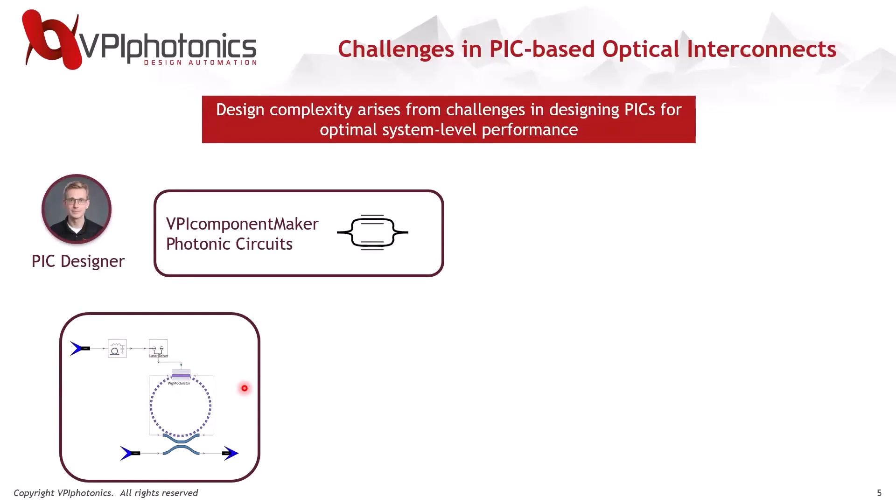For example, you might have a PIC designer, today that will be Eugene, who's working on designing and modeling a silicon photonics microring modulator, which is not a trivial task in itself. When he's done, he will pass that model to Nebraska, who will represent the optical systems team, to integrate it into the full optical interconnect system, which may contain electrical and optical components in the transmitter and in the receiver. It might contain a fiber span, multiplexing, equalization, DSP, and more. So also not a trivial task.

Those two teams need to work together to do some file exchange to ensure that the PIC model can be used in the full system simulation. Also, this microring modulator may degrade the performance of the system in some unexpected way. So the teams actually need to go back and forth between the system simulation and the photonic circuit design, which can be complicated and time-consuming.

So what we provide is a solution that brings together PIC design and system simulation, all within VPI Photonics design suite. It's a single user interface and single design environment. We've integrated the system solutions together so that your PIC can be tuned and optimized while considering the full system level performance. Schematics can simply be shared between the PIC designer and the optical systems team, so they can collaborate together, saving time, but also reaching the optimized PIC performance that considers the full optical interconnect system.

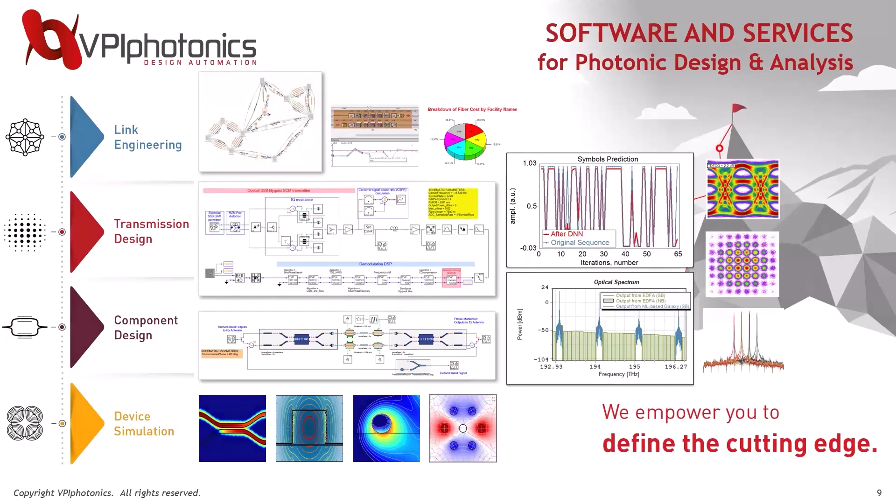Today, we are going to be focused on VPI Photonics Design Suite, specifically using the two solutions, VPI Transmission Maker Optical Systems, together with VPI Component Maker Photonic Circuits. But you should be aware of our other software tools. We've developed them all in-house so they can all be integrated together in a complete photonic design workflow. If you check out our YouTube channel, you can see a number of tutorials going through many of these different tools.

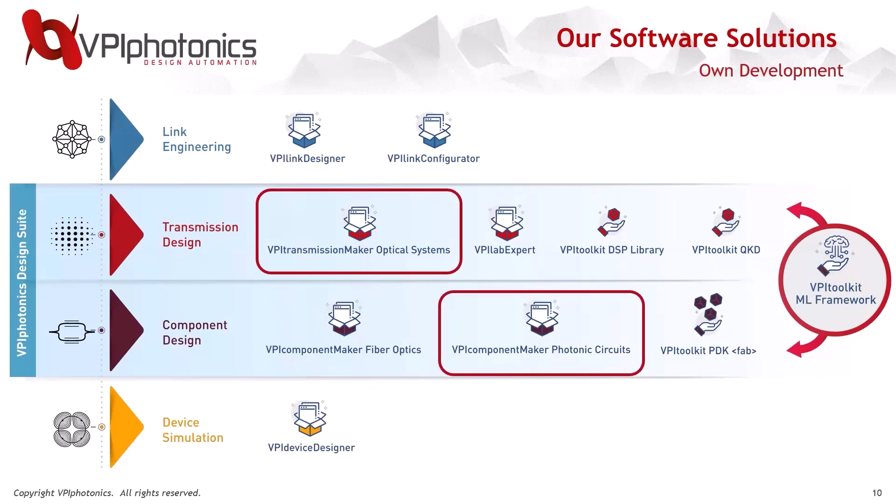To share more details specifically about VPI Transmission Maker Optical Systems, it can be used for a wide range of applications. Today we're going to be focusing on short reach optical interconnects, but it also supports ultra long haul DWDM systems, even radio over fiber and laser SATCOM simulations. It can be used to simulate single mode and multi-mode fibers, explore different coding and modulation formats, study different DSP algorithms, compensation strategies, and equalization strategies as well. It also provides very flexible analysis tools to generate eye and constellation diagrams, and also to evaluate different metrics like bit error rate, TDEC-Q, OMA, extinction ratio, and more.

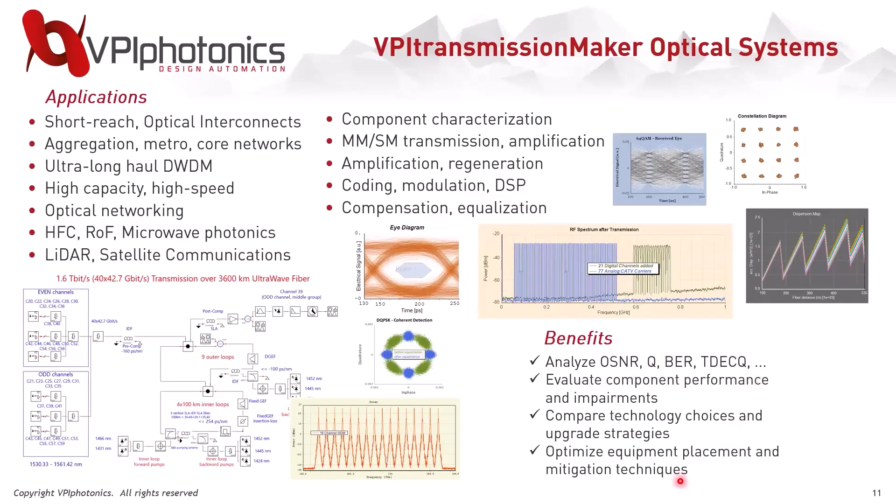We'll also be focusing today on VPI component maker photonic circuits, which supports more physical and bidirectional modeling on a smaller length scale and time scale for active components, for signal processing elements, and for passive circuits. This tool is material agnostic, so simulations for hybrid PICs are supported. This solution enables you to design your PIC, look at different design alternatives for it, study fabrication tolerances, and in the end, tune and optimize your circuit parameters. One of the highlights of this tool is our active component model, the Photonics transmission line laser model.

Here's an example at the bottom: a widely tunable hybrid III-V silicon laser. You can see that this photonic TLM model is used to model the SOA between the two ring mirrors, and it can account for impairments like back reflections, two-photon absorption, carrier dynamics, and current nonlinearities like four-wave mixing, and more.

We also support Foundry PDKs with the software, and provide a framework for you to customize your own PDK from your own measurements or simulations. You can encrypt those models and share them with other teams or customers to ensure your IP stays protected. So let's take a look at today's agenda.

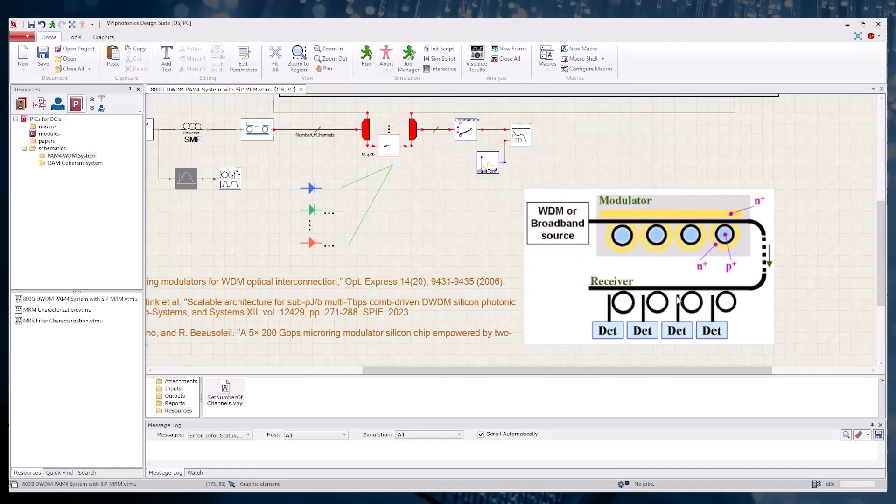The concept of the system is not new, as we see in this figure, taken from reference 1 here, from 2006. The concept is having a WDM source, as you see, and then modulating the output using a set of cascaded ring modulators. At the receiver side, we demultiplex these channels using a set of ring resonator filters, and then we do detection.

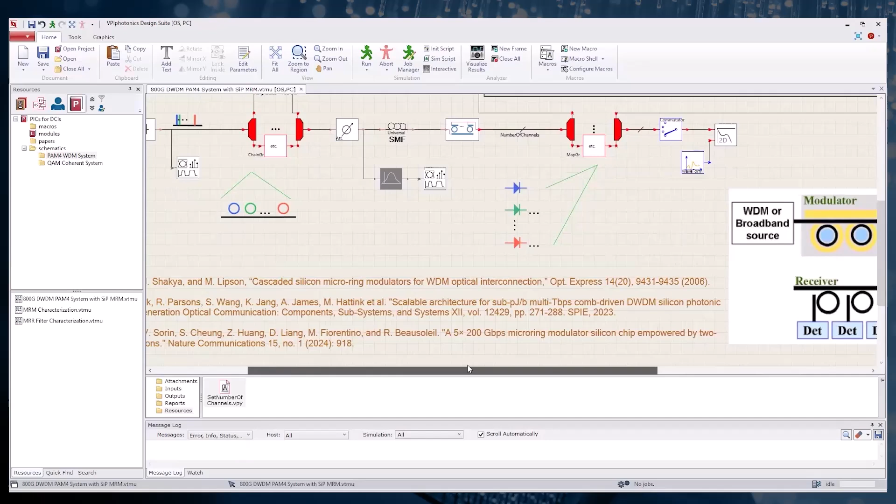Although this is not new, interest in ring modulators and ring filters continues to increase, especially for data center applications. There is tons of literature in this field. You can see newer papers here - references 2 and 3 just as examples, but there is a lot out there on these components for data center applications.

Now let's look at the schematic itself. To implement this concept, at the transmitter side we have the laser sources, and we construct an array of these. You see these modules here, the red modules - these modules help to replicate, so to duplicate a module.

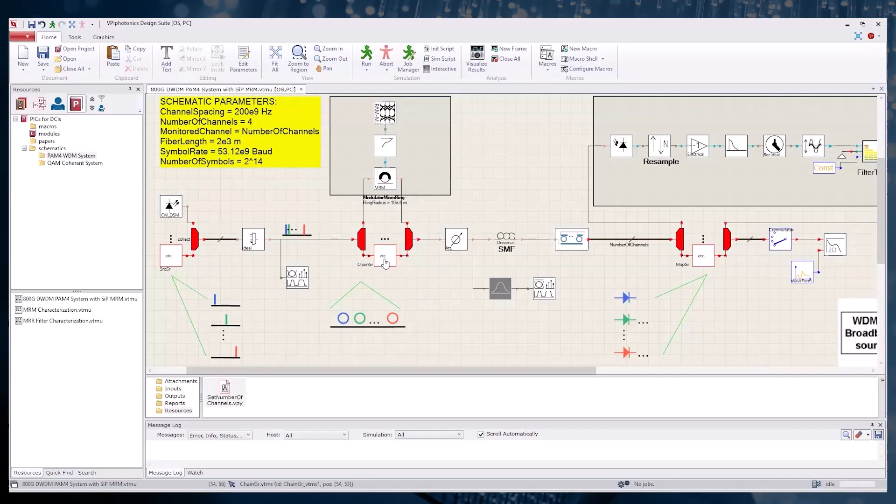For example, using this module, source GR or source graphical, helps me create an array of lasers, whereas this next one, chain GR, helps me create an array of modulators in a cascaded manner, or like a chain. The last module here is similar but different - it also helps me create an array of receivers, but in a parallel manner, so the receivers here are set or created in parallel.

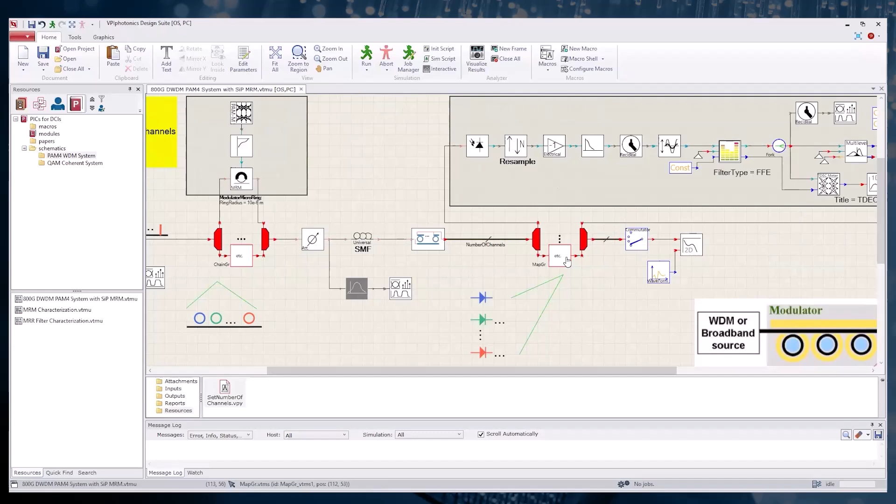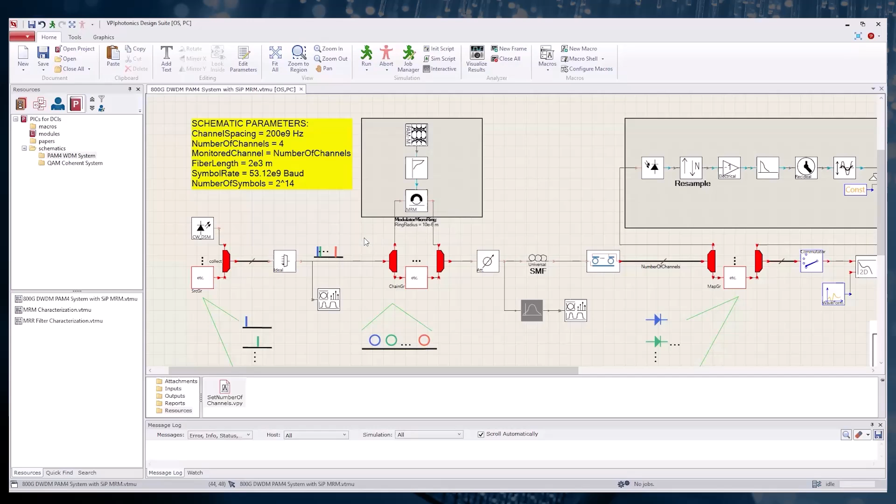Okay, so let's go back here. Using this multiplexer, we multiplex these tones coming out from this array of lasers, then we have a comb signal at the output of the multiplexer. Now these modulators - initially we have 4 modulators for the 4 channels, and each modulator is cascaded again. Each modulator is tuned to a specific wavelength, ideally, so that it applies the modulation to that specific wavelength. There will be some leakage to other channels that we'll be looking at.

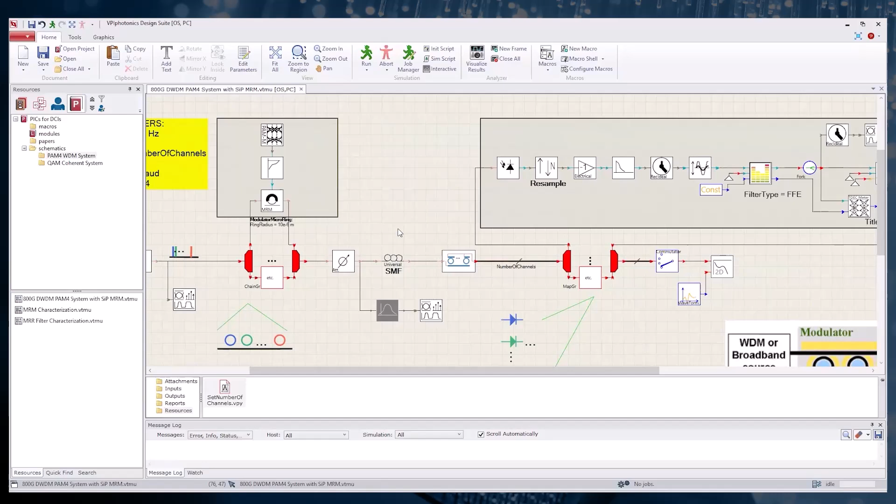But then at the output here, we have the modulated signal, the DWDM modulated signal, with a channel spacing of 200 gigahertz. We do the transmission through the fiber here, and by the way, this is done in the O band, so all the channels experience the different effects of fiber, such as chromatic dispersion, attenuation, and nonlinearities.

And then after transmission, we have the filter. This filter here works as a demultiplexer, and it's based on a ring resonator filter. We can look inside, and we see...

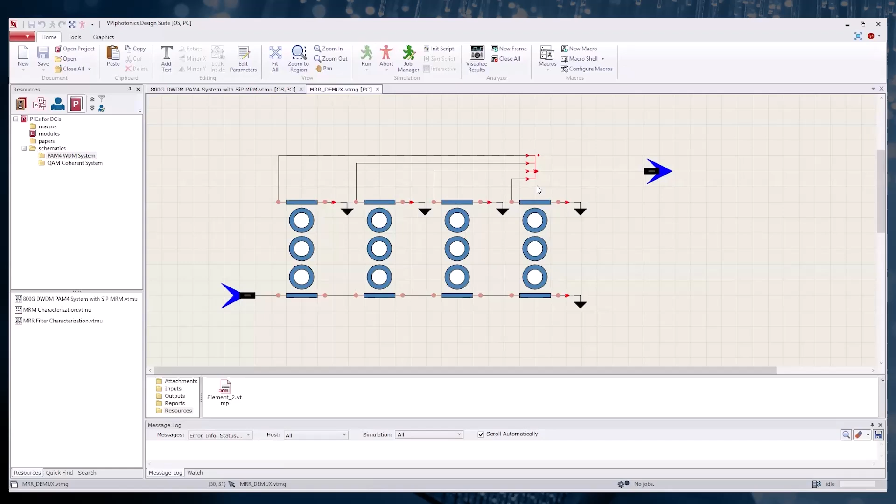These modules are from the library of photonic components in the software, and they give me multiple outputs. So in this case, we have 4 outputs for the 4 channels, and then they are tuned properly so that they tune to these channels, to these wavelengths.

And then at the output here, we detect the signal. So after photo detection for each channel, we do some signal scaling, bandwidth limitation, and feed-forward equalization. And then we assess the TDEC-Q and SER using these modules. Let me run the schematic while we continue explaining it.

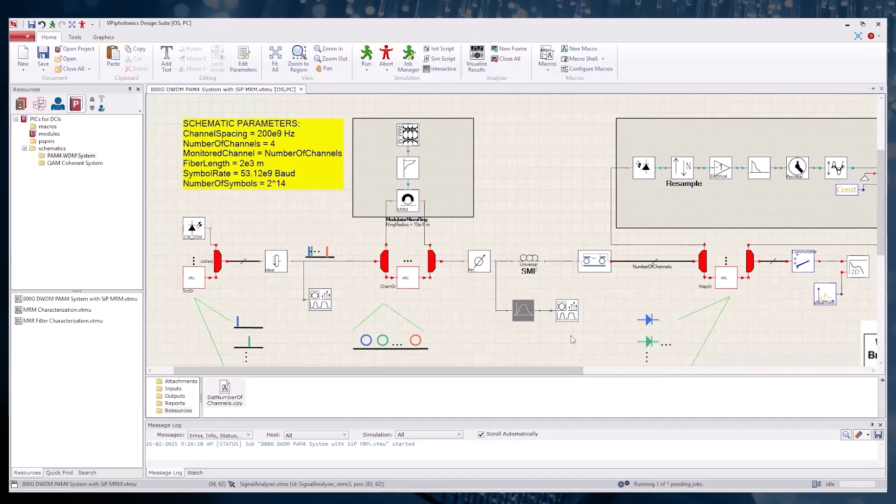So again, here, yes, we have 1 receiver, but just a reminder, it's duplicated, so we have 4 of these in parallel. We have signal analyzers here, so we'll be visualizing the signal at the output of the laser source, the WDM source, and at the output of the modulators, that's after modulation, and we're looking at the SER.

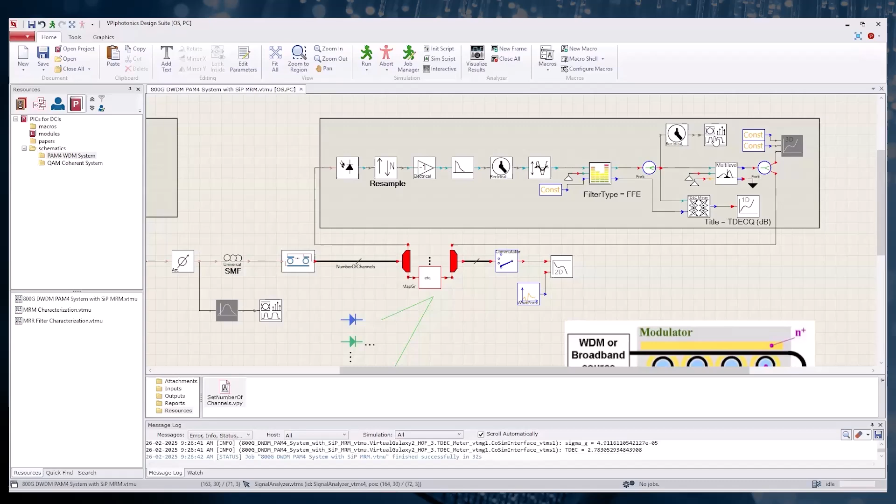That's using this analyzer here. And we'll be looking also at the electrical signal here at this point after equalization. We chose to show the electrical signal for the monitored channel, which we chose to be the last channel. So in this case, monitored channel equals number of channels, so this is channel number 4.

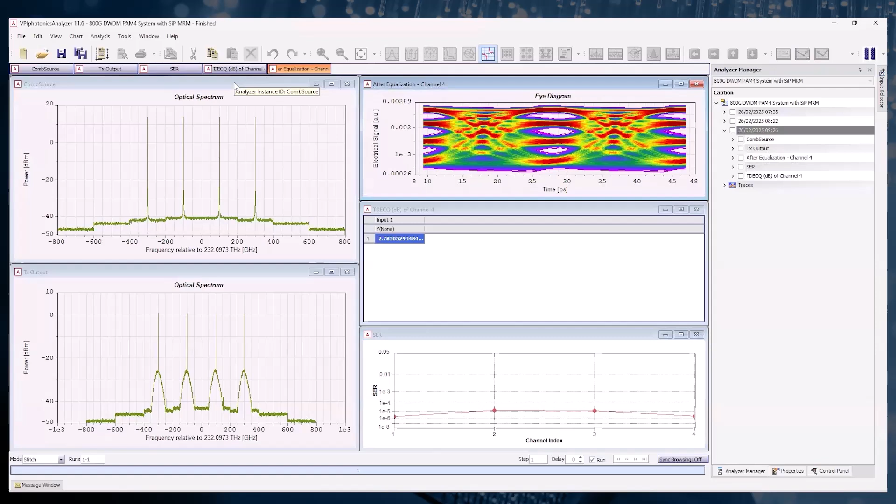I already got the results, so it took only 32 seconds to simulate, and we can see the results here. So this is the OSA, or the optical spectrum analyzer. I see the optical spectrum for the signal. This is at the output of the WDM source.

I have the 4 tones with 200 gigahertz channel spacing. Then this is at the transmitter output, as you see, the modulated signals. And here, this is visualizing the electrical signal after equalization for channel number 4, as I mentioned.

And this is the TDECQ in dB for this channel. We see a good eye opening. And then this is the SER versus channel index.

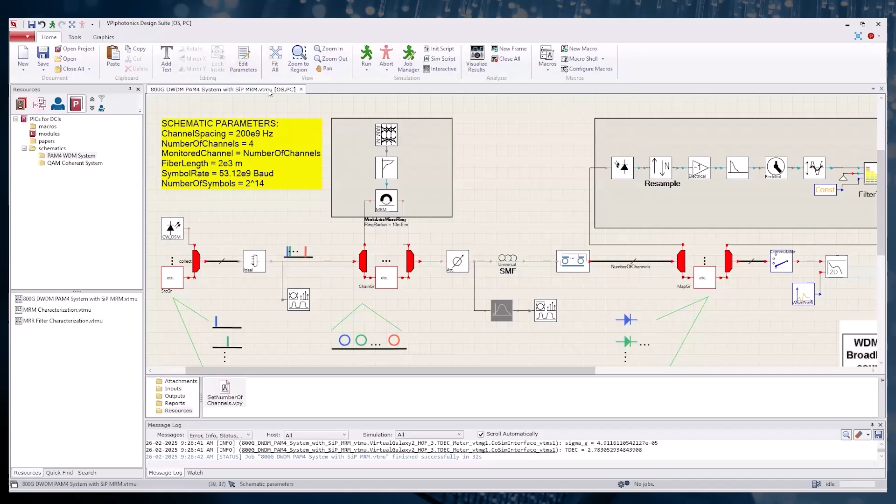So now this is for 4 channels, so actually here the system works for 400G. And let's say we want to upgrade to 800G. So we have this macro, if we fit this, that helps me to do this.

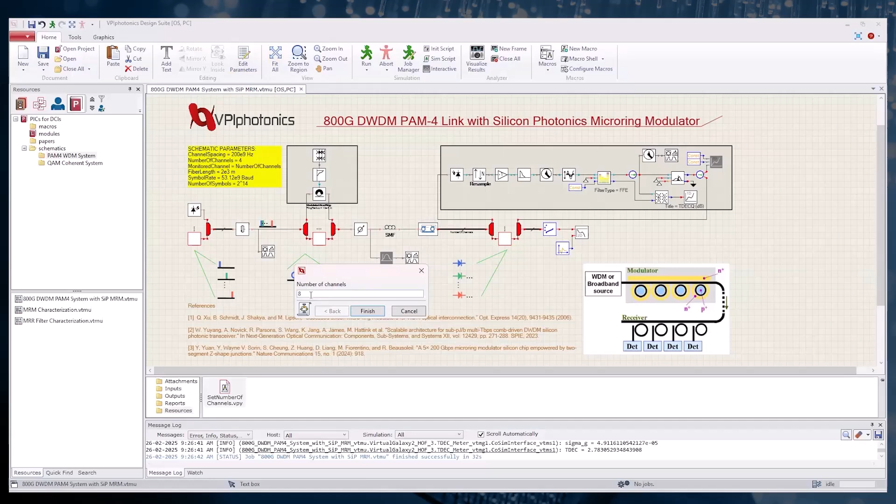I'm going to run the macro and run for 8 channels. So I can specify the number of channels using this macro. And what this macro does is update the ring resonator filters here, this galaxy, and also it will update some schematic parameters. So let's run it, and you see now this is done.

So now the filter is updated to accommodate 8 channels. Let's run again now. After this update, some parameters were also updated in the schematic using this macro automatically. So if we run again, we can see then the performance with 8 channels instead of 4. So we want to do the 800G.

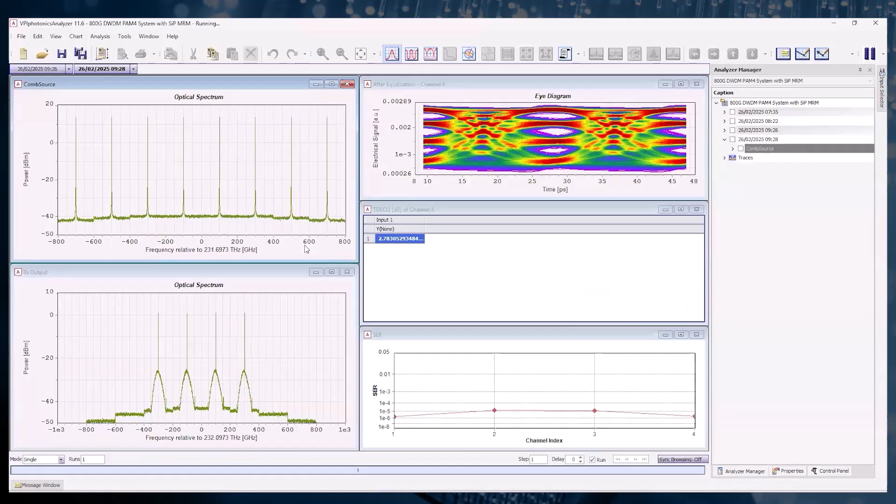Okay, so we see the results now for this case of 800G. Now we see we have the 8 channels here for the WDM source. Again, this is the modulated channels. And then this is the eye diagram for the last channel, channel number 8 in this case.

And we see that the performance is good for the first 6 channels only, but not good for channels 7 and 8. So I then wonder about this. Just to recall, if I switch back, these are the previous results with 4 channels, and these are the new results with 8 channels.

So as a system specialist, I go back and try to investigate this to see what the problem is. Why am I not seeing a good performance for channels 7 and 8? But then I see that I would need to reach out to the team of photonic circuits, in my case, Eugene, to discuss this problem and see why this is happening.

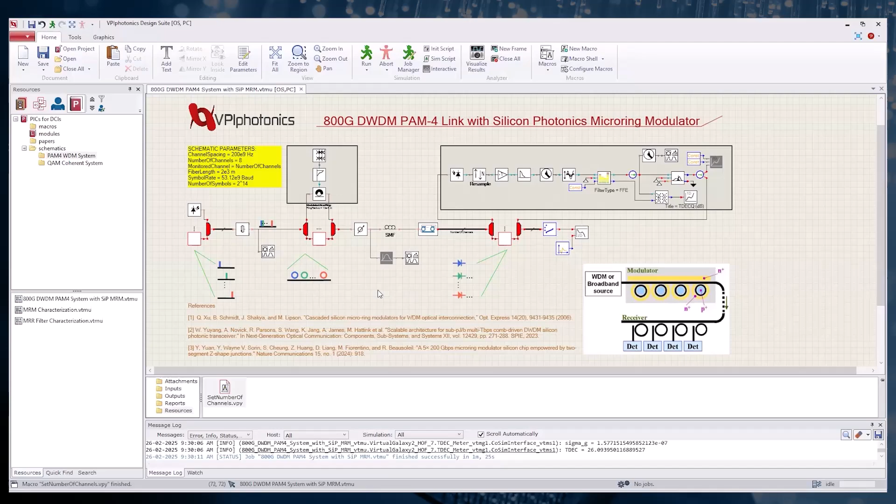I would like to pass the talk to Eugene to tell us more about this and how we managed to identify the problem and solve it. So Eugene, the floor is yours. Thank you, Nebras, for setting up the problem.

So I would be happy to take a closer look into our PIC-based microring structures in the system.

In general, system-level engineers very frequently underestimate the importance of detailed PIC modeling. They frequently base their simulation on higher-level performance metrics and some datasheet models, and in many cases this works really well. However, not in the case of advanced state-of-the-art solutions and emerging technologies. At the same time, accurate modeling is very important because it can reveal impairments or fabrication variability, which has a very significant impact on system performance, and we may need some design optimization early in the development.

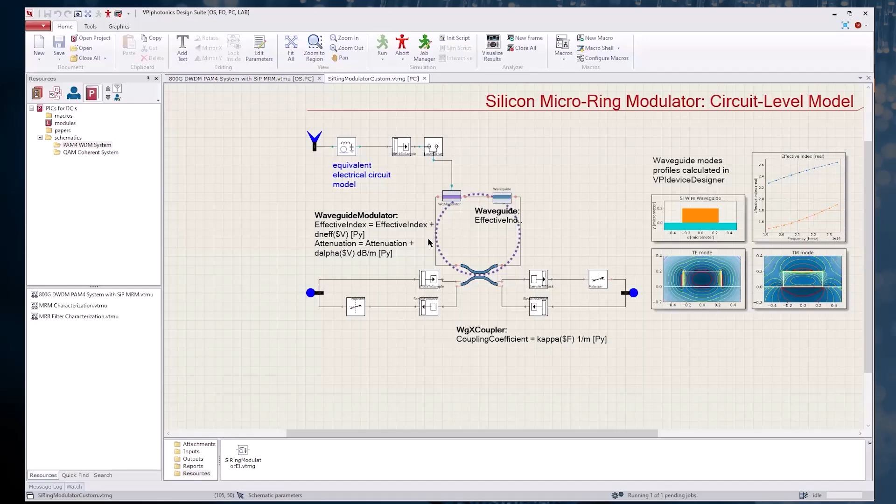So let us take a look how we address this problem on the example of the microring modulator. This is the system we would like to explore. The design of a silicon microring modulator is relatively simple: we have a ring resonator coupled to a waveguide, and it resonates on specific wavelengths. The position and transmission depend on the effective index, and once we start depleting carriers, we start modifying the effective index. This is how we perform the modulation.

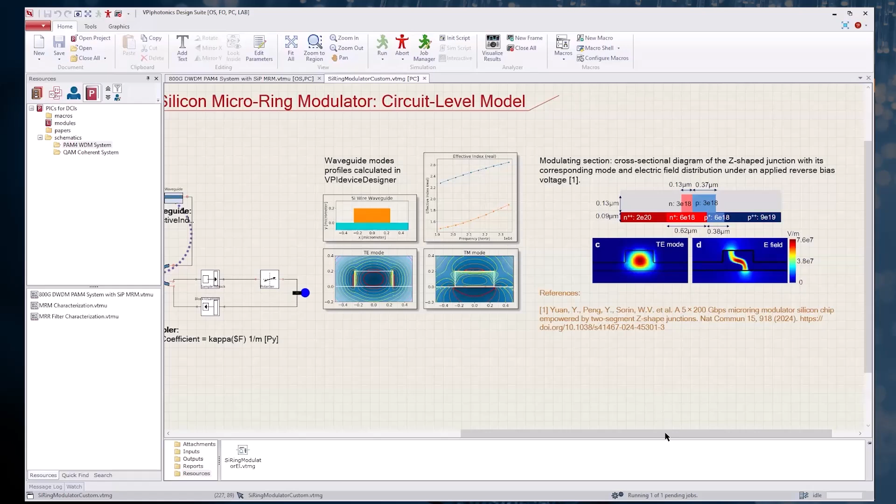Silicon photonics is not really a new technology, it's pretty well established, and for many reasons. I'm sure we all know it's a CMOS compatible technology, so it allows for compact size, lower power consumption, and as we can see in this particular example, it's really suitable for DWDM applications. However, there is tons of other research, and here's just one picture from a study where they try a Z-shaped PN junction to optimize the overlap between the PN junction and the waveguide mode.

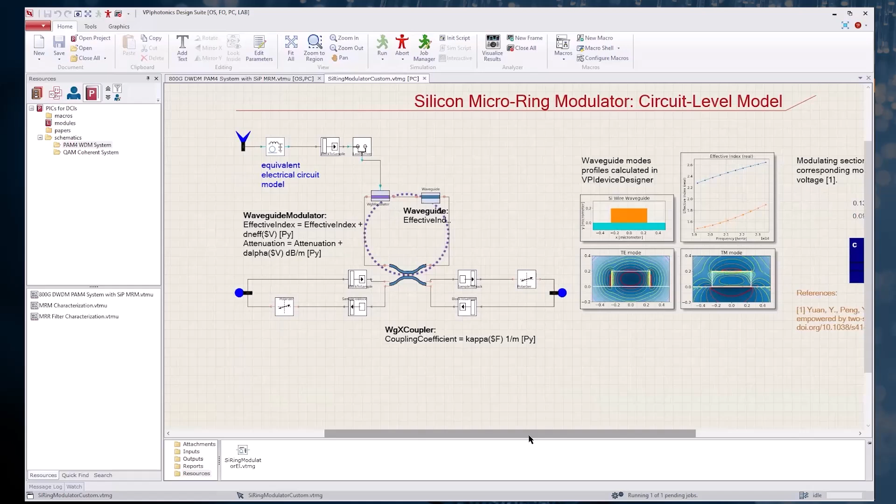It's not the topic for this conversation today, it's more that we're interested in how we can adjust the parameters and get feedback into the system. For that, we propose a framework of characterization test benches. Let me open the first one. This is a universal test bench which works regardless of the actual design and model implementation of the microring modulator, and it covers a set of different characterization modes. For this, we either visualize and analyze the spectrum of our microring modulator sitting here in the middle, or we just launch an ideal CW laser on a particular frequency, and then we have some visualization and analysis tools.

So let's just visualize the transfer function of our microring modulator. This is a typical transfer function, and we can see it's a pretty narrow filter.

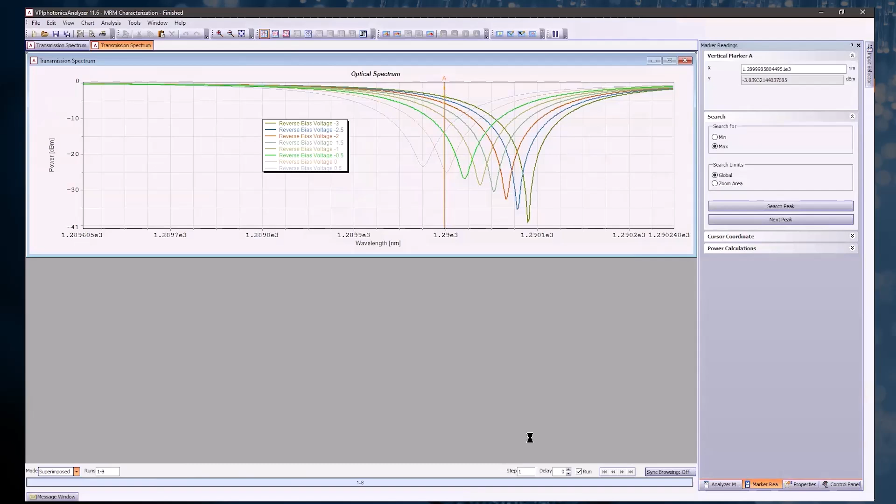Now if we start applying reverse bias to our microring modulator — I'm using this little sweep routine to automate the process — we can actually see how the performance of the transfer function changes. Now if we tune to a particular frequency here, let's say this is the wavelength of our first channel, and we start varying the reverse bias voltage, we can see that our channel would see different transmission. This is how we achieve modulation. That's the basic operation of the microring modulator.

However, there is also one more feature of the transfer function which we haven't discussed yet. If I zoom out, I can see that my transfer function repeats itself, and this makes a lot of sense if you remember how the microring modulator operates — it's just matching phase conditions. So if our phase differs by just 2 pi, we're going to see the repetition.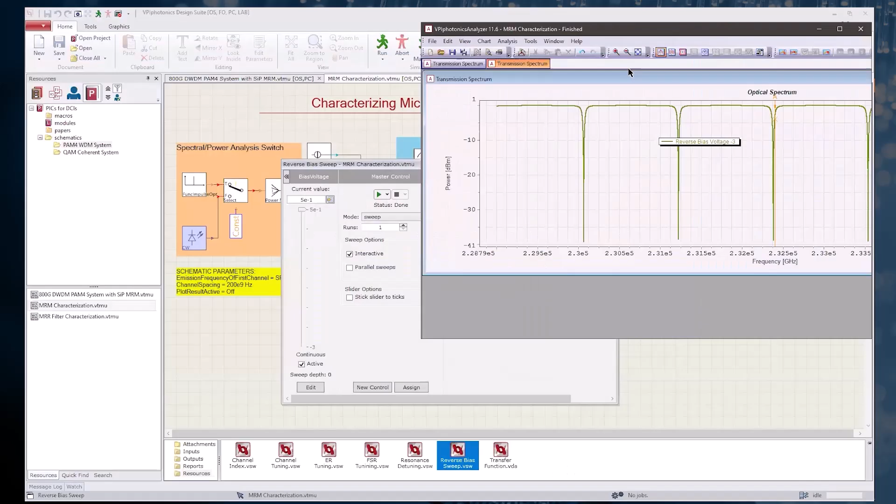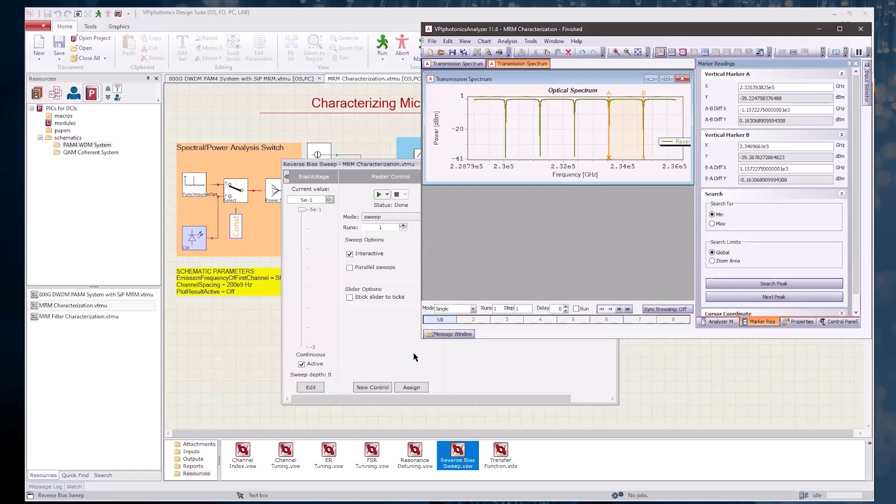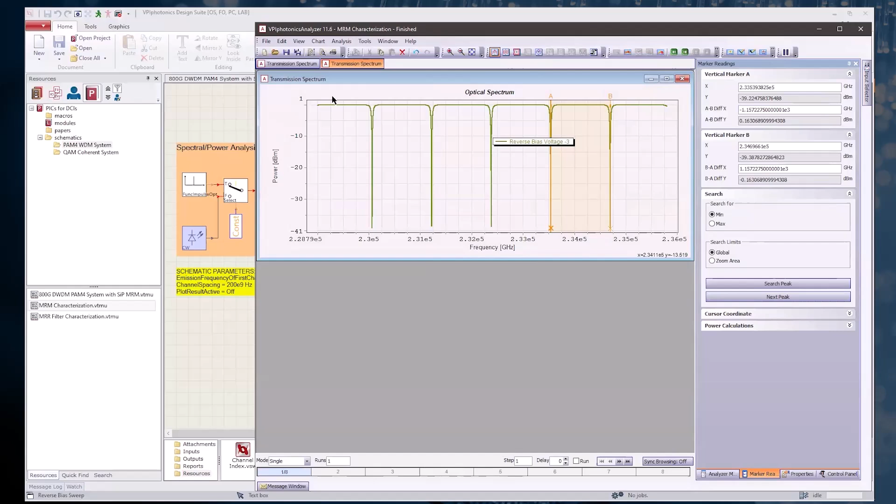Let me switch to gigahertz here and add another marker. Now we have measured this distance, which is called the free spectral range. If I measure the distance between two neighboring peaks, I can see that it's a little over 1 terahertz. Now remember, in our simulation we wanted 200 gigahertz channel spacing and we wanted to fit 8 channels, so obviously we cannot do that. We can't, just because our free spectral range is smaller, so it doesn't really fit all of the required channels. That's a problem, and how can we solve it?

For this, we can actually vary the design parameters of our microring modulator, and the natural one is tuning the ring radius. So I'm running another test bench here, which varies my ring radius.

Let me switch to the single view.

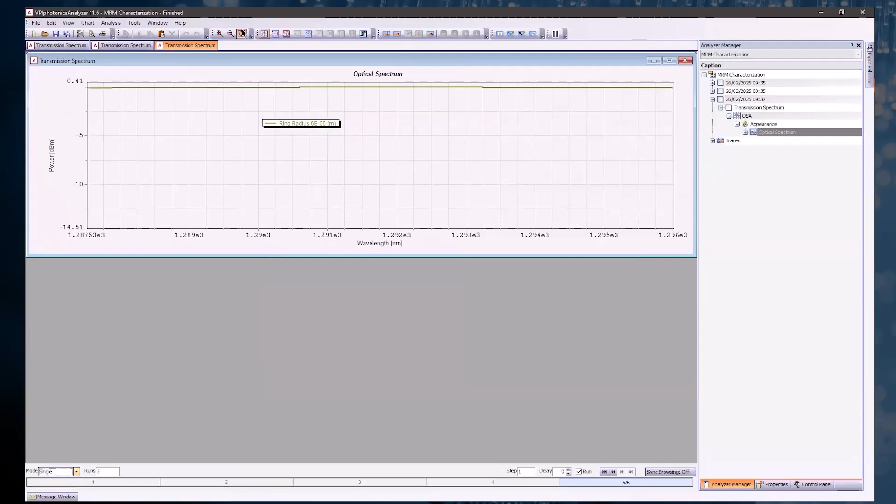Now once we start varying the radius, we can see that our free spectral range changes, and we can see the value of the radius here in the middle. The smaller the radius, the larger our free spectral range. If we measure the free spectral range again, we'll see that a ring radius of 6 microns would be able to fit all of our channels. So we're going to stick with this value.

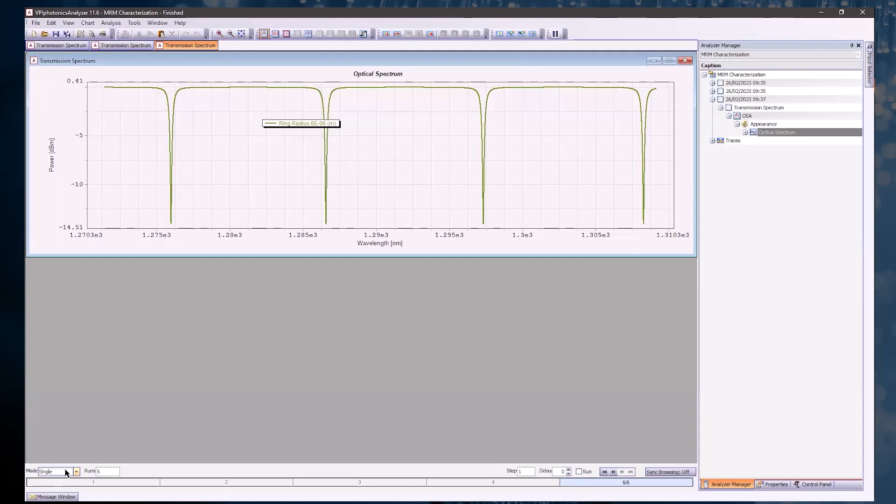However, there are a couple more things going on. If I show all of the peaks again, we can see two things happening: we also shift our resonance frequencies. So if we had them tuned to our channel frequencies, this is not the case once we change the radius, so we need to do the retuning again. Another thing happening is that our extinction ratio changes, which makes sense because we also need to adjust the attenuation.

So let's address those two problems. For this, I go back to my schematic. First of all, I need to specify the updated value for my microring modulator. We specified 6 microns because we found this to be the optimum solution to achieve the desired free spectral range.

Now we can run this channel tuning test bench. There are two things happening here: one, we sweep our channel index to tune our CW laser to our channel frequency, and then we perform the tuning of the phase shift for each of the channels. Usually this could happen with some thermal phase shifter.

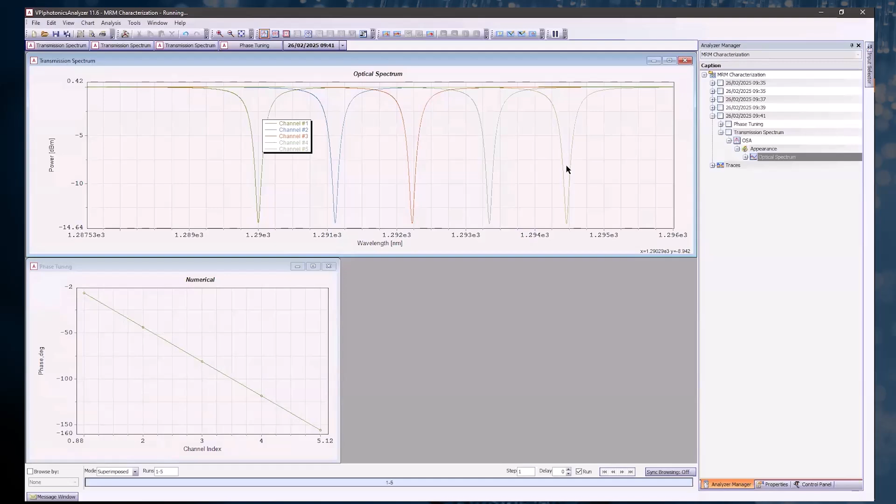Now if I check the simulation, we can see that our channels are tuned again. We can see this by the fact that our first channel is tuned to this first channel wavelength, and we find all of those required phases to achieve this tuning.

What we need to do now is take those values and get them back to the schematic. Here we have the global parameter, channel tuning MRM, which goes into the tuning phase shift of our microring modulator. We can also automate this process, so I just run this macro here to update those parameters. Those are exactly the same as we specified in our optimization routine.

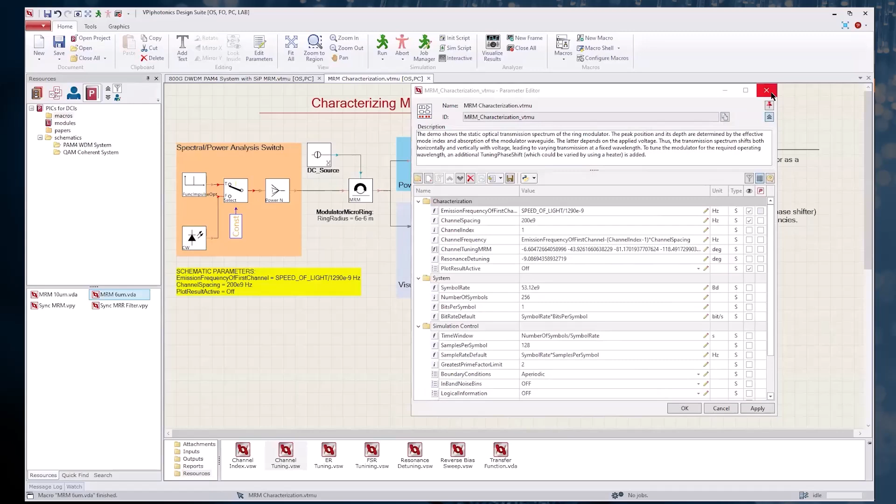The second thing we wanted to do is achieve the desired extinction ratio. Currently it's just minus 14 dB, and that's maybe not as efficient for best performance. We need to do this because changing the radius of the ring should also change the attenuation, so that's what we're doing in this test bench.

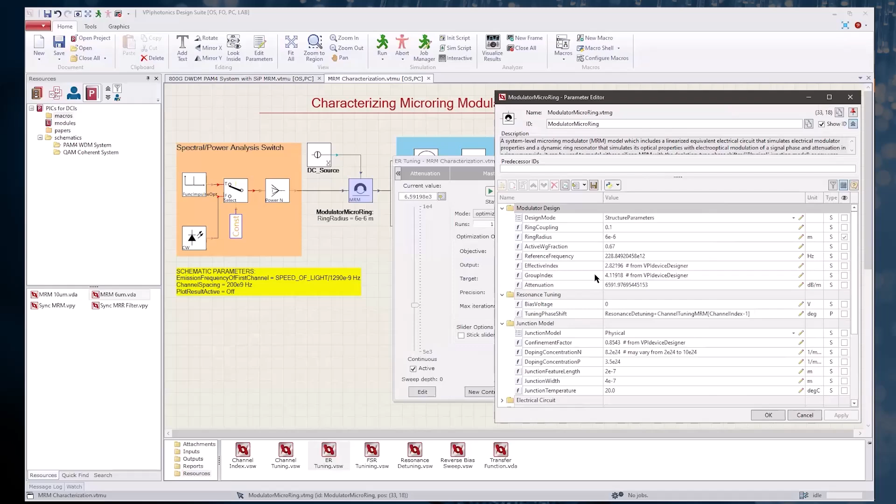We are varying attenuation so that we meet the desired target of the extinction ratio of minus 25 dB. This is the value we found. We can just click the button and transfer this value into the attenuation value of the microring modulator.

There's one final step: usually we don't really operate at this exact location. We want to detune it a little bit from the resonance frequency, from the channel frequency. So the last final touch is that we need to do this resonance detuning by applying a small additional phase shift.

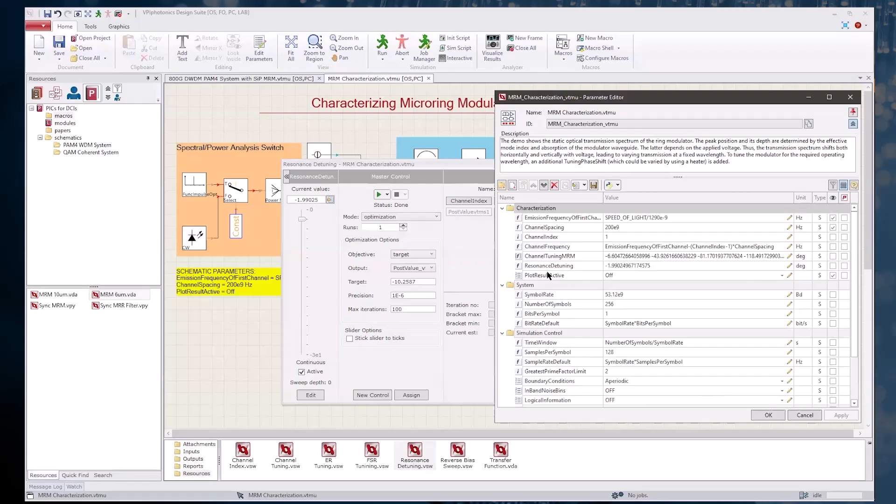And yes, we can find it as well. So we pass it to this global parameter, the resonance detuning parameter. Now if I visualize the transfer function, we can see that we obtained the right tuning and our extinction ratio has the desired value.

Okay, that's enough for the microring modulator. We have another structure for microring-based resonators, and that's again a pretty big topic. In fact, a couple of years ago we did a whole webinar with our partners, so please explore that webinar.

The structure is relatively simple again. We have multiple rings stuck together, and if we choose the coupling between them properly and design this properly, we can obtain a flat top passband filter.

Again, I've plotted fabrication tolerances here, so we get the same problem: we need to tune those rings to our desired frequencies. Let me just do this little run, but there are other things as well. For example, if we want to change the bandwidth of this filter, it's not like we just change the value.

We actually need to change the geometrical dimensions of those rings, the distance between the rings, etc. So that's something we also need to deal with. But that's how the tuning works. Again, we need all those phase shifts to tune to proper frequencies. And if we want to change the channel spacing, this means we need to do all the retuning again.

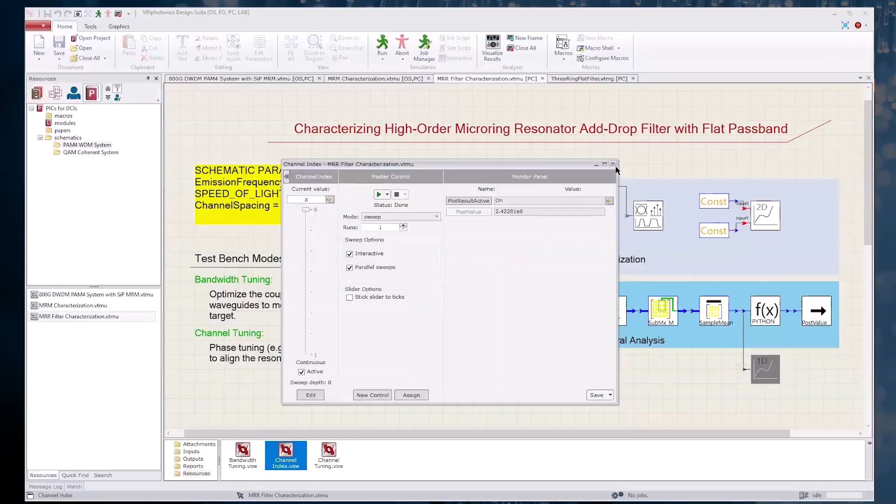So the question is now, we did all this tuning, right? So how do we pass the adjustments in our models to the system? There are a couple of things.

One thing is that we support the module library. This means that, for example, this 3-ring filter is actually shared between different schematics. So if I go to my system schematic, look inside this cascaded structure, and look inside this guy, it's exactly the same model. So if you do any adjustments here, they automatically synchronize.

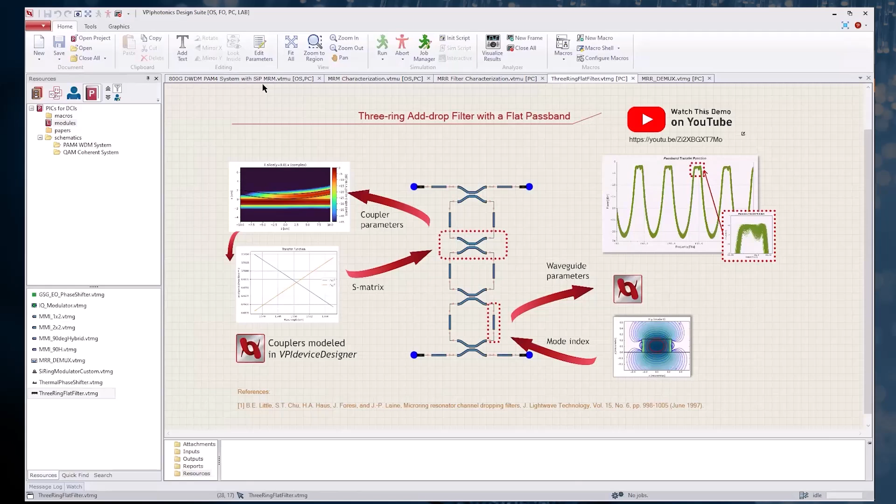However, there are also some parameters. For example, in my microring modulator, we still have this 10 microns radius, attenuation is wrong, and all the phase shifts are wrong. So how can we automatically transfer those parameters? For this we have also a little macro, because it's very easy to forget to transfer something.

So we automate this process. I can just click this macro, and it automatically goes to my test bench and updates all of the values.

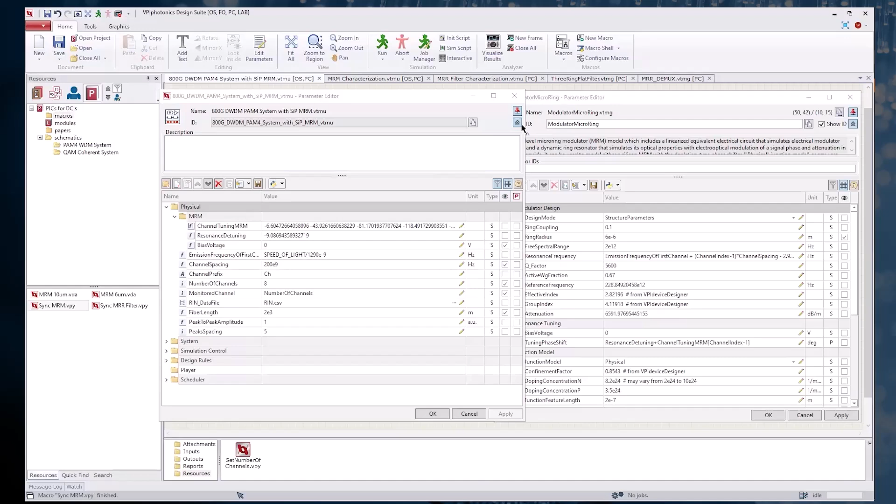Now what we can do is actually try to run the simulation again. Let me run the simulation and see if the fixes we applied actually help improve the performance of the system.

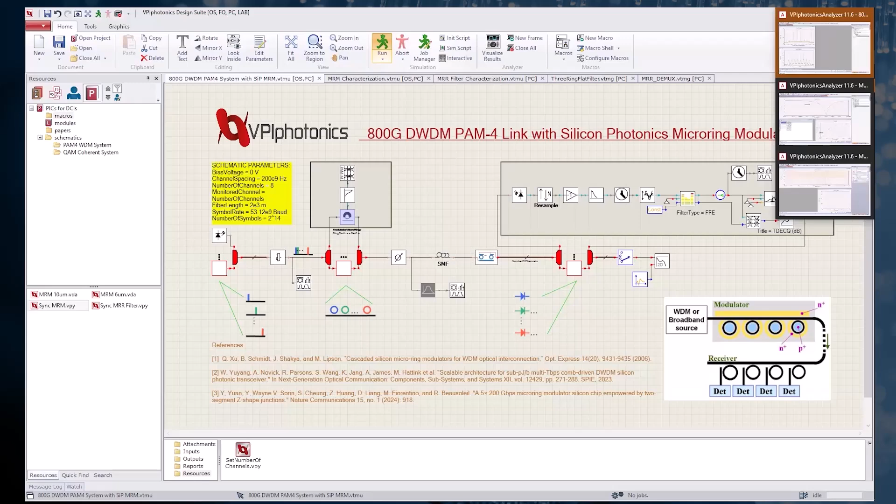So for that, we can check first the results for the case which Nebras was showing for 10 microns. Microring modulator, and as you remember, channels 7 and 8 were particularly bad. This makes sense because of the free spectral range - we remember that once we don't have enough space, they start to interfere with some adjacent channels.

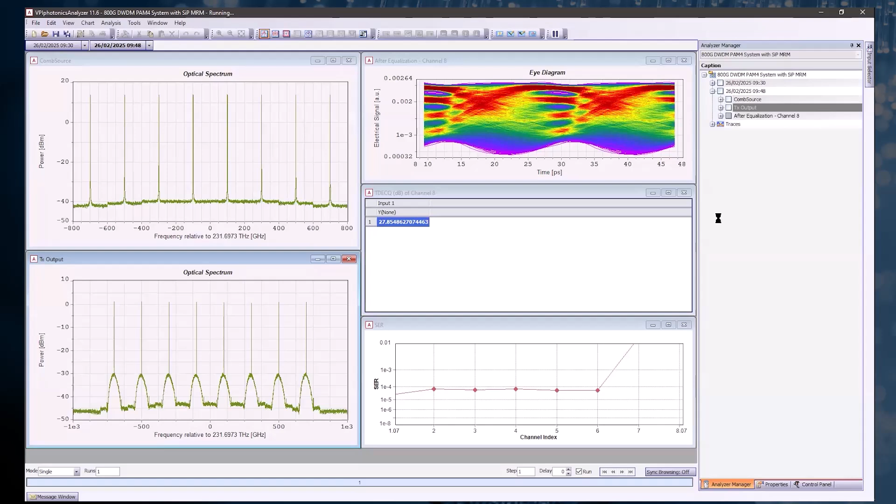So now we have the results coming up for the updated case, and let's compare if they can really help improve the performance. Okay, here the results are coming. So here's our updated results.

We can really see the improvement. Our eye diagram is now open. We have the improved TDECQ, and we can clearly see this in the SER measurements. So if we switch back to the previous case and to the updated one, we can clearly see that we fixed the problems Nebras was showing.

So this is the end of the first part of the presentation. We're happy to address your questions once the presentation is over, but now I'm excited to switch gears to the next example of the coherent system. With that, I give the floor to Chris and Nebras again.

Okay, so now we have discussed the previous example, which was on IMDD. We had the 800G DWDM system that's based on PAM4, and the transmission distance was up to 2 kilometers. Now, I'd like to recall what Chris discussed in the introduction about data center interconnects, that the requirement for transmission distance could be anywhere from tens of meters or hundreds of meters up to tens of kilometers. So it can be anywhere there.

And here we see the advantage of coherent technology, because this allows us to achieve higher order modulation formats, which gives me space also to vary the transmission distance. So I can go for a longer transmission distance with a lower order modulation format, and so on. That's very useful for data center interconnects.

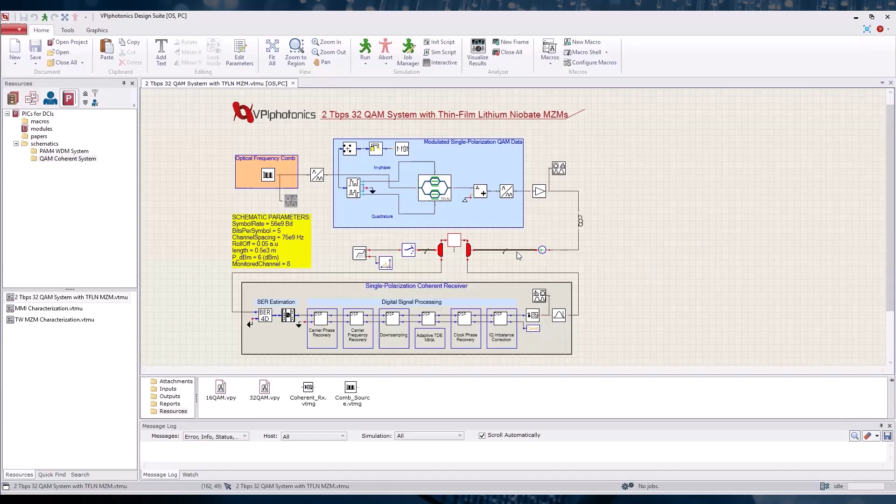So this brings us to the second example here on coherent detection. We see here the schematic, and again this is a standard structure for a coherent system, but with some differences. Let's look at the structure of the schematic. At the transmitter side, we have the optical frequency comb, where we generate the tones for the DWDM system. And here we do the modulation using a thin film lithium niobate modulator, and the modulation then is applied to these tones.

So the baud rate in this case is 56 gigabaud. We're starting with 8 channels in total for this DWDM system. The channel spacing is 75 gigahertz, and we are using raised cosine pulse shaping with a roll-off factor of 0.05 to accommodate these channels given the channel spacing.

So the modulation format initially is 32 QAM, and this is what we are applying using the driver of the modulator. So at the output of the modulator, we have the 8 channels being modulated. The modulation is applied to all 8 channels in this case.

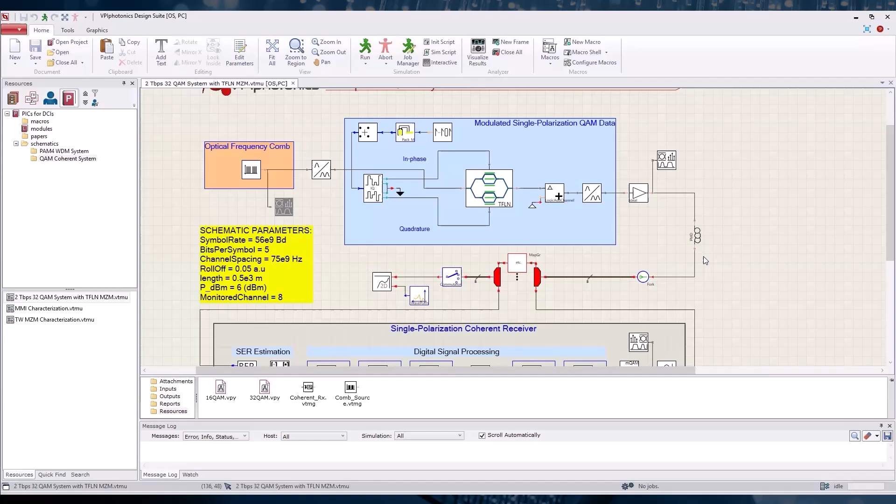We are testing a single polarization modulation. Then we do some adjustment to the power using this amplifier with a specific noise figure as well. Then we do the transmission. Initially, for 32 QAM, the transmission distance is 500 meters.

At the receiver side, what we do is filter one of the channels, the channel of interest, that's the monitor channel, we call it. Then we use a standard structure for the coherent receiver. So this is the coherent receiver.

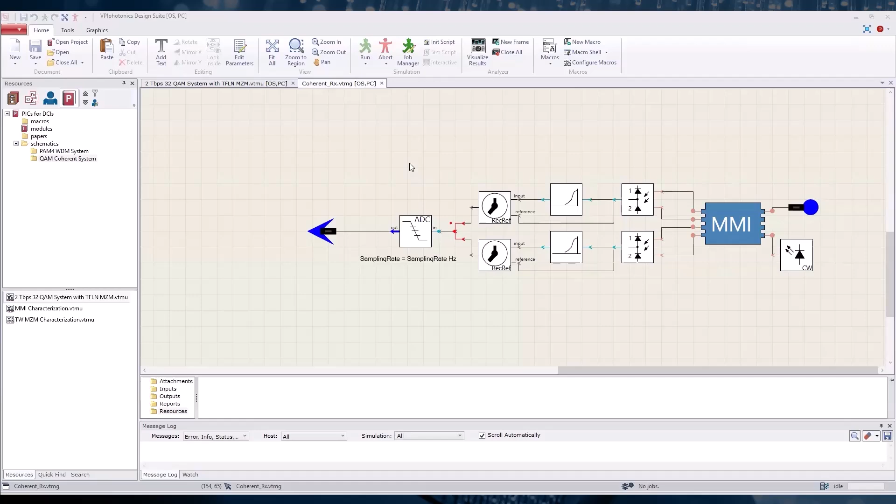We can look inside and see that this is based on this photonic circuit component, the MMI, that represents a 90 degrees hybrid. We do balanced photodetection here with a specific CMRR and responsivity imbalance as well, that's specified. We do bandwidth limitation, and at the end we digitize the signal using an analog to digital converter with a specific resolution. So if we go back, we can view the parameters for this coherent receiver.

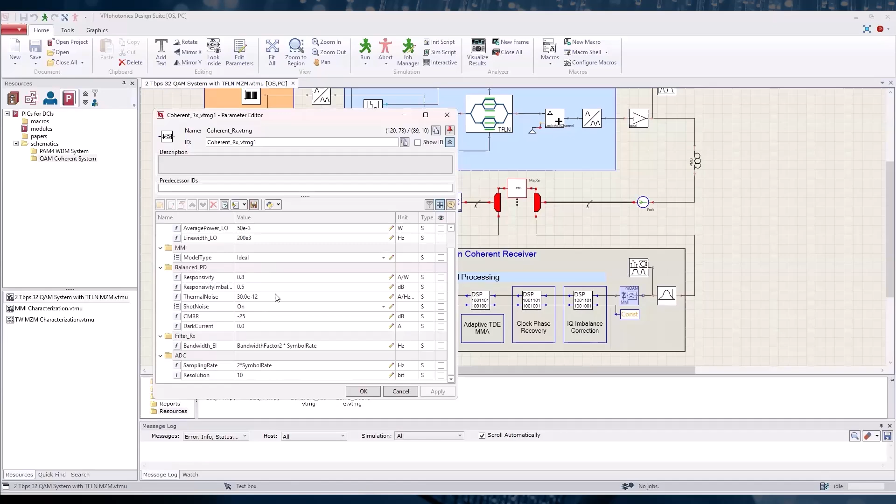As you see here, these are the parameters for the local oscillator, the MMI, the balanced photodetectors, and the ADC. There are more parameters inside of the Galaxy that can be customized. We just chose the main parameters in this case to show on this level.

After this, we do the digital signal processing. This is the standard digital signal processing. Now, because we are transmitting in the O band, we are not doing CD compensation in this case. We just have algorithms for IQ imbalance correction, clock phase recovery, time domain equalization with multi-modulus algorithm, and then we end with carrier frequency recovery and carrier phase recovery to compensate for the phase noise of the transmitter and the local oscillator.

So now if we look at the system, we imagine this system needs to be for a data center application, and we need it to be in a small form factor. So we need this transmitter, and the components here need to be on a photonic chip. So using photonic integrated technology, we want to manufacture this, and the same applies to the receiver components.

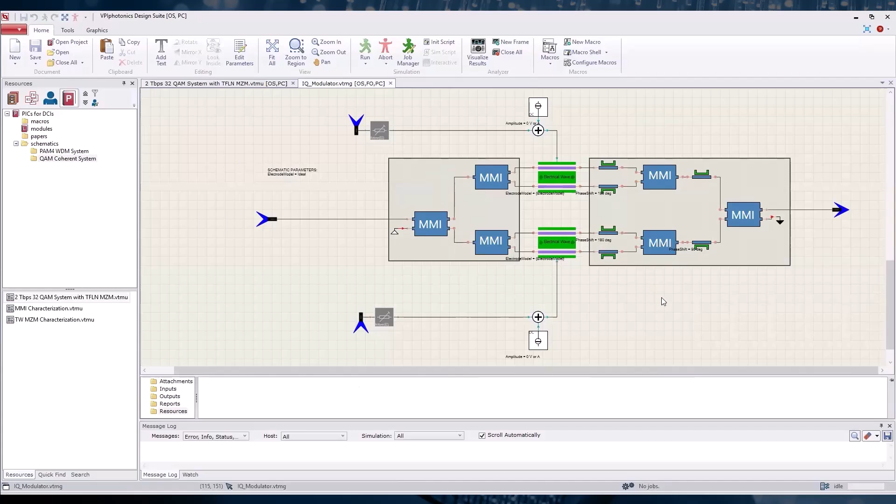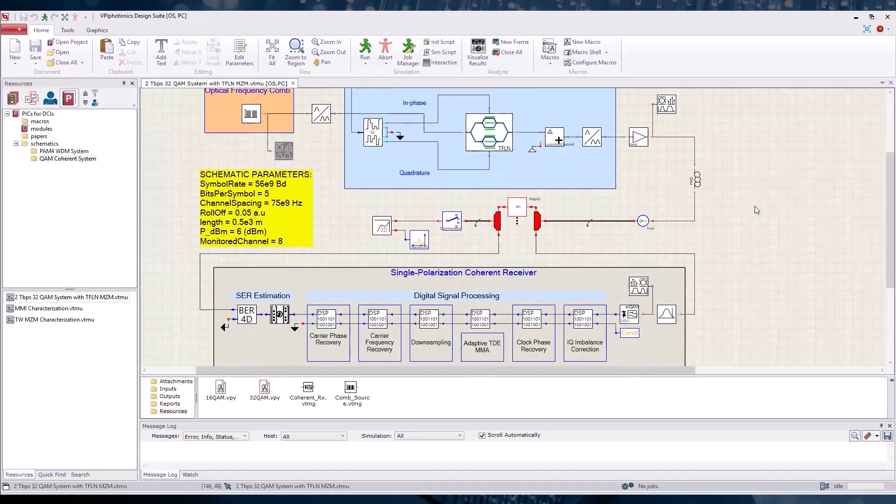Here we notice some crucial components, such as the optical frequency comb generator and the modulator, which if we look inside, is built with photonic components. The same applies to the 90 degrees hybrid, as I showed for the MMI. The role of these components is crucial, and their design process is not an easy task, but it's implemented mainly by the photonic integration and photonic design engineers. So this is a mutual work between the system team and the photonic component team.

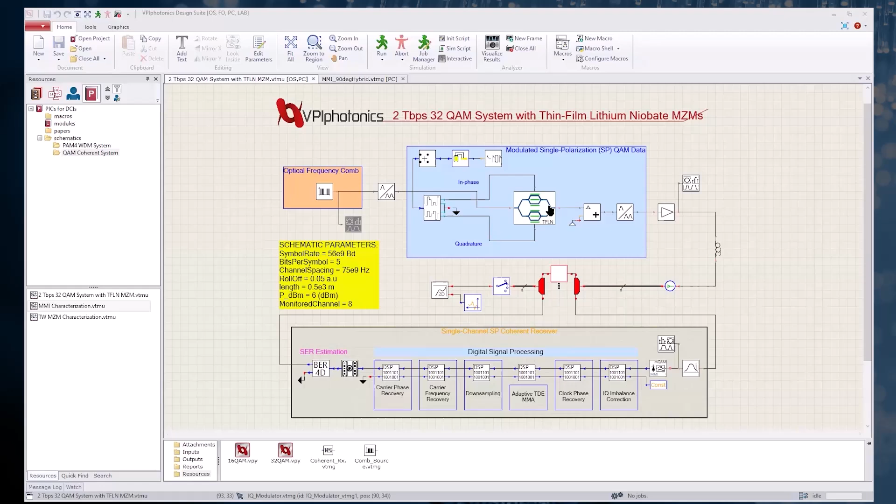That's important, but again, there are tons of other properties. The thin film lithium niobate has really interesting nonlinear properties, which are very important for photonics computing, for example. But here we really focus on this fast modulation, and that's important in our IQ modulator. Also, this is a great integration platform, so we can implement other functions with it, and one of them is actually this 90 degrees hybrid.

So it is implemented based on a multimode interference device, an absolutely key component in any coherent receiver. The MMI is a relatively simple integrated photonics component, and the idea is that we launch our usually single mode signal into the wide waveguide. This wide waveguide supports multiple modes, and once they're excited by our input signal, they start to propagate along the waveguide and interfere with each other.

And if we cut our device at proper positions and put the output waveguides there, we can obtain variable functions. In this case, for example, we can see that it operates as a 1x4 splitter, or it could be a 2x2 coupler or 1x2 splitter. So all of them could be implemented. And what's important, they also have specific phase relations, which matters for our 90 degrees hybrid operation.

And the model, again, it's pretty important to have the physical model here. As we can see in the cross-section, the splitting, although it's a pretty good one, the splitting ratio is slightly different. So it's important to account for this, because this kind of impairment really has a huge impact at the system level, and we need to maybe mitigate those effects with DSP.

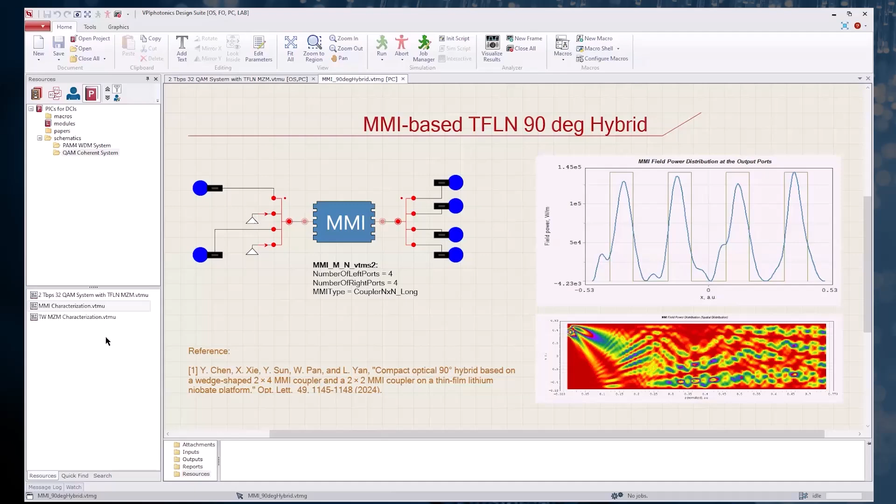Similar to our previous example, we support a set of test benches. One more thing to highlight here is the importance of, so we discussed a lot that it's important to have accurate models, but at the same time it's also important to have ideal models. And that's why we try to implement both within one component.

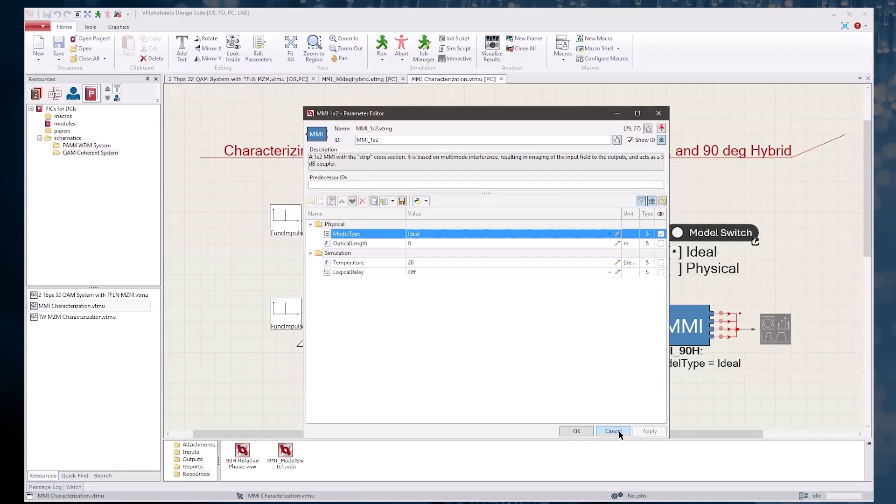We can see, let me show a result later, that we support both ideal and physical models. So why is it important? In the first place, because it simplifies debugging. Let's imagine something goes wrong in your system and you need to figure out what is responsible for this wrong behavior. Then switching on and off different effects is really a crucial part.

So we can identify, okay, maybe that's our imbalance in MMIs, or maybe that's our imbalance or CMRR in our balance photodiodes. We need to find those key components, and supporting different models is important. So for example, now I switch to physical and we can compare the performance between the physical and ideal model. In the ideal, you see there's no frequency dependence.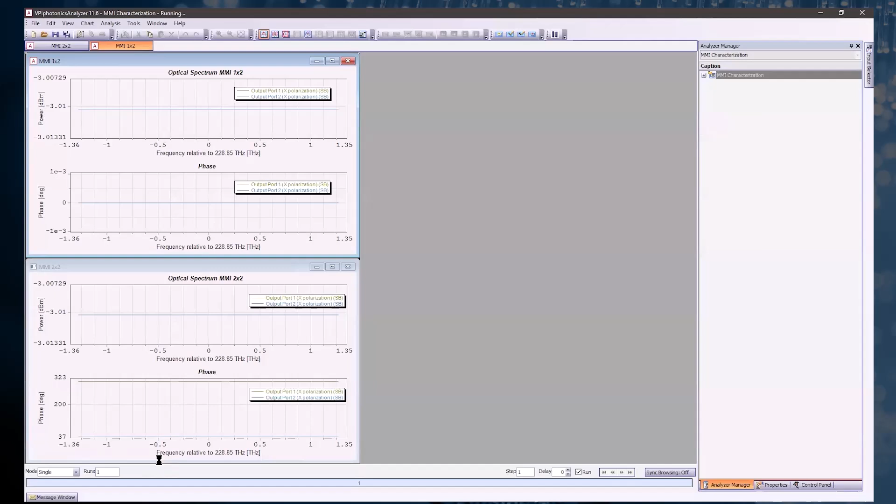However, phase relations are supported. If we get the results for the physical, we already see that our splitting ratio depends on the frequency, and there is some imbalance in the case of this MMI 2x2. Again, it's important, especially once we operate with multiple tones, operating with multiple frequencies. Over the bandwidth, our operational bandwidth, we may see different splitting ratios, and we need to account for those.

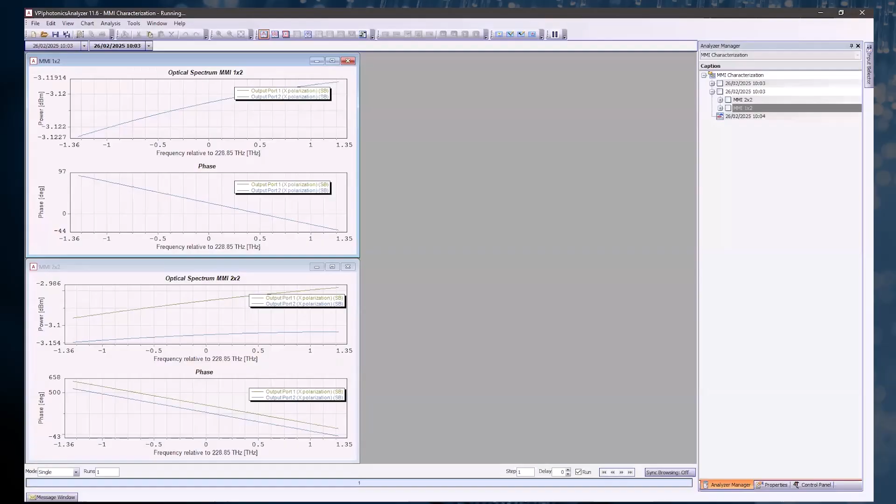We can also check the performance of our 90 degrees hybrid here. For this, I just use this little test bench. If you're not familiar, the idea of a 90 degrees hybrid is relatively simple. We have two inputs, one for the local oscillator and another for our signal, and then those two are combined on different output ports but with different phase shifts. This allows us to demodulate our I and Q components in the IQ modulator.

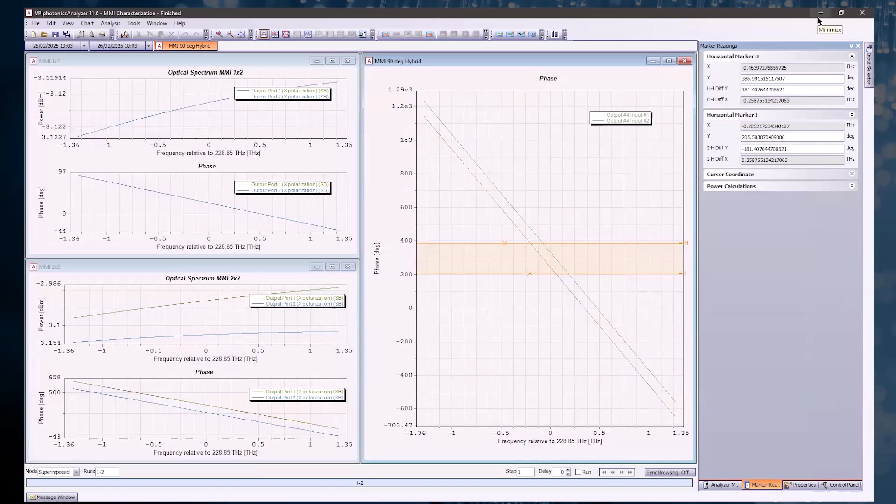So if I check the simulation results and look at the different outputs for both inputs, we can see that, for example, for the first one we got a 180 degrees difference, no phase difference for the second port, and 90 and minus 90 for ports 3 and 4. So this shows that yes, this model is a good candidate for working as a 90 degrees hybrid, and we can implement it in our system.

So the second component, and probably the most crucial one, is our IQ modulator. As Nebras was showing, it consists of two Mach-Zehnder modulators, and those Mach-Zehnder modulators are traveling wave. So we use those MMIs to split and combine the signals, and then we have this electrode here in a ground-signal-ground configuration, so that our RF signal is applied in the middle. That's a pretty typical configuration for high-speed electrical driving.

And again, for this test bench we have several different modes of operation. But let me discuss a little bit more on this traveling wave, because that's an essential part, and that's actually what allows for high-speed modulation in this particular case. So the traveling wave actually ensures that our electrical signal and optical signal propagate along the waveguides and electrodes with a similar speed.

And we can investigate this. So we have, for example, group index electrical and group index optical as parameters, so we can see how this velocity mismatch impacts our performance. And then we have some electrical models to actually calculate the voltage which our waveguide sees, because this would depend on the actual position of the modulated section. So supposedly we have several segments along our waveguide.

And this model was developed within the ELENA project, a project to create a thin film lithium niobate platform for PIC design. So you can learn more about it.

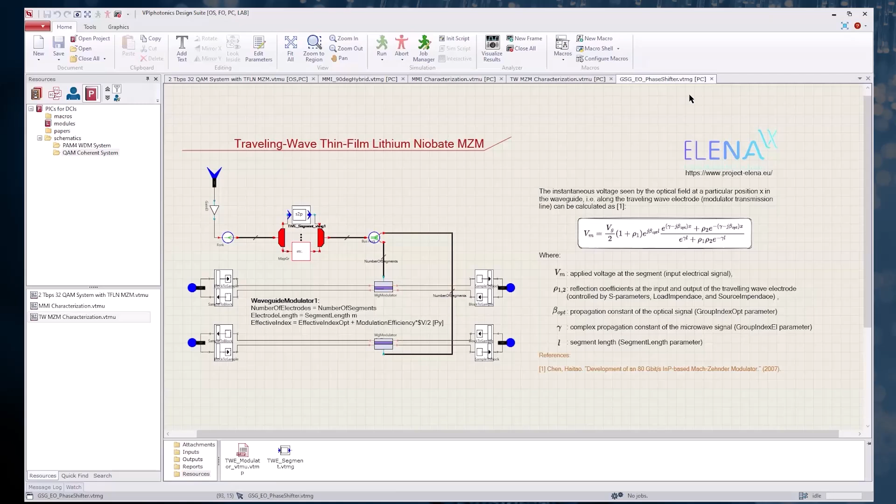Switching back to our test bench, you can see that it's kind of neat and compact. That's because we are using this very specific model, TestSetModulator, and this model allows for automatically generating the signal and analyzing the modulator outputs.

We support several different analysis types here. So we can specify, for example, for bias, what voltages we would like to vary at which optical frequency, and the same for modulation frequency analysis type.

We actually show the modulation transfer function for different models. One last thing that's similar to MMI, we support two electrode models: one is more ideal, and one is more based on S parameters, where our electrodes interact with each other.

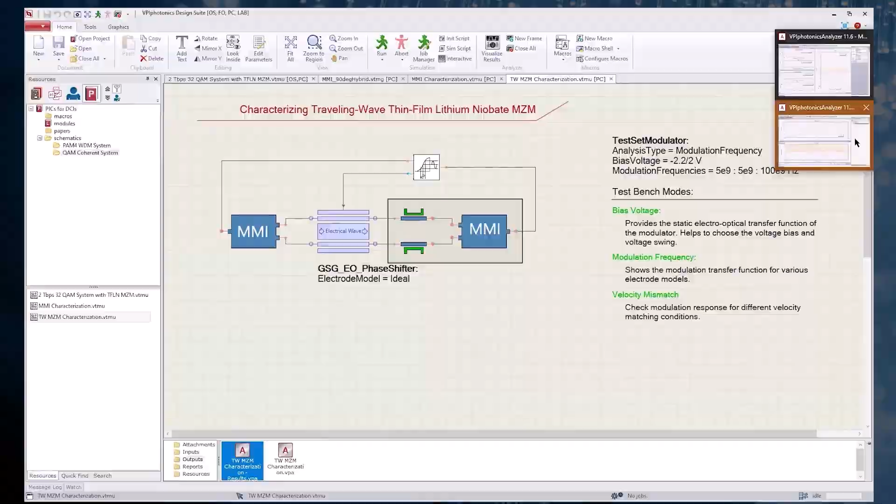To save some time, I just did the simulation ahead of time, so now we can just visualize the results. On the top, we can see this bias voltage, and we can use it to define the operational point.

We see that the models for the static characterization are pretty much the same. However, if you look at the modulation response, we can see significant impact of the electrodes and their electrical properties on the bandwidth.

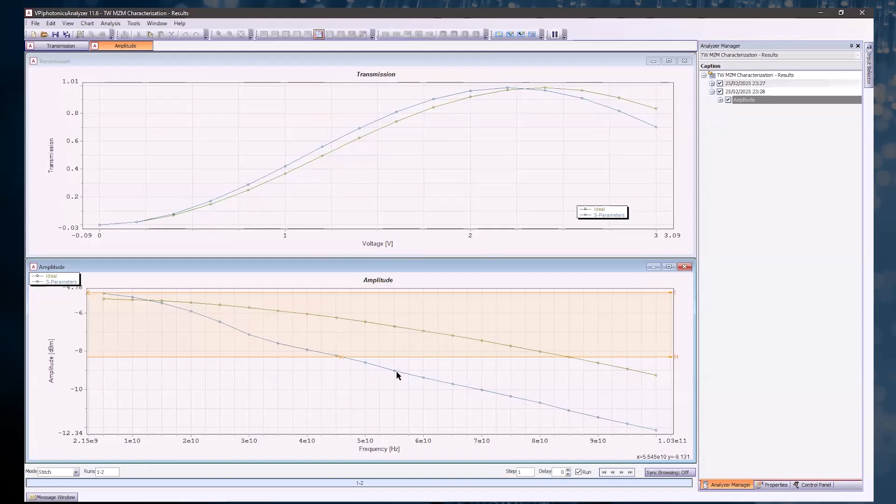So yeah, maybe we need to play around, maybe we need to optimize the biasing, for example, in order to achieve a little bit higher modulation response. But once this is done, we pass the models to our optical system specialist to explore how they could be incorporated in our coherent system.

So Nebras, yeah, let's show how they work. All right, thanks Eugene, again.

So back to the system level. Let's say, as a system engineer, I receive these components from the Photonic components team, the modulator and the 90 degree hybrid, and I want to test them in the system. There are actually many things to test on the system level.

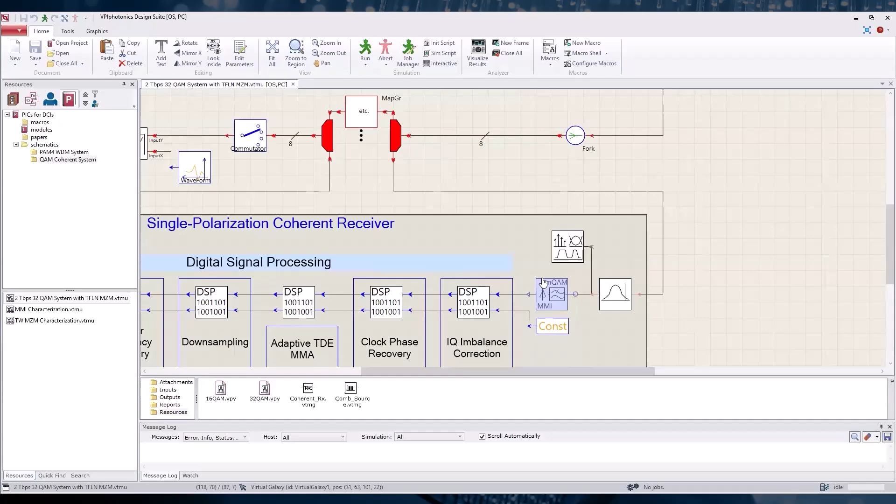For example, what's the effect of imperfections in the modulator, how about the MMI, can I use DSP to mitigate these imperfections? Also, some system metrics such as the roll-off factor, the bandwidth limitation of the driving circuit to the modulator. There are many things to explore, and that's a part of the design process.

But in this case, we chose some of the tests to highlight, and I'll tell you what these are. Mainly, I chose to start with the case where, of course, the modulation format is 32 QAM.

I want to try back-to-back, and we started actually without TDE, or without time domain equalization. We want to see, so in this case, this module is inactive, okay.

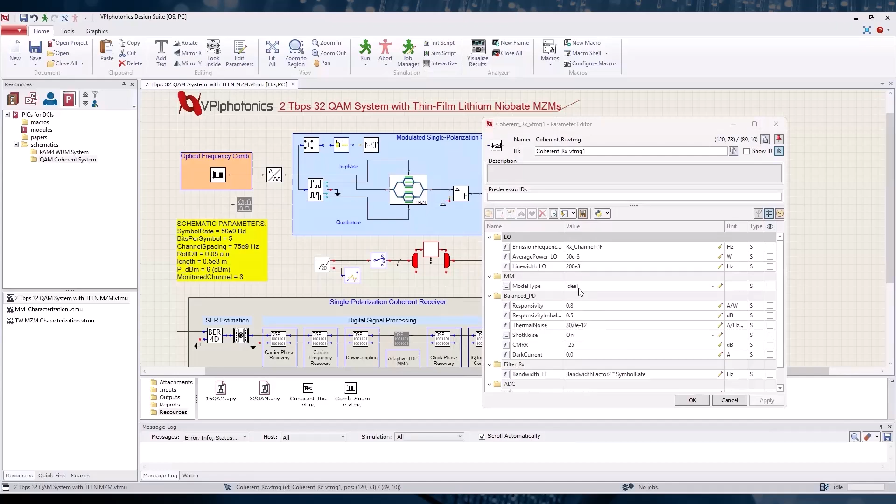And for the modulator here, now you know the differences between ideal and physical from what Eugene showed. So we chose the electrode model to be ideal, and the same for the MMI model here, ideal. So model type is ideal rather than physical. So that was the starting test.

So that's one case. And then, you know, with 32 QAM, we have 2 terabits per second. We'll be switching to a lower order modulation format and seeing the difference in performance. So that was case number 1.

We'll be looking then at the modulated signals here before launching into the fiber. We'll be looking at the constellation diagram for the monitor channel, that's channel number 8 in this case, last channel. We'll also be looking at the signal before or after filtering here, after this filter.

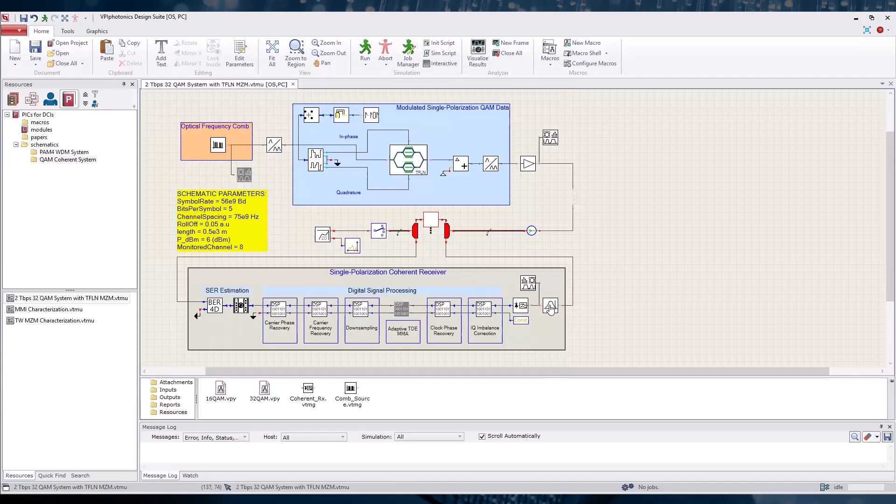And just a reminder here, we are also doing parallel detection, so all 8 channels are processed here in parallel. So we get the SER for all 8 channels. So that's test number 1.

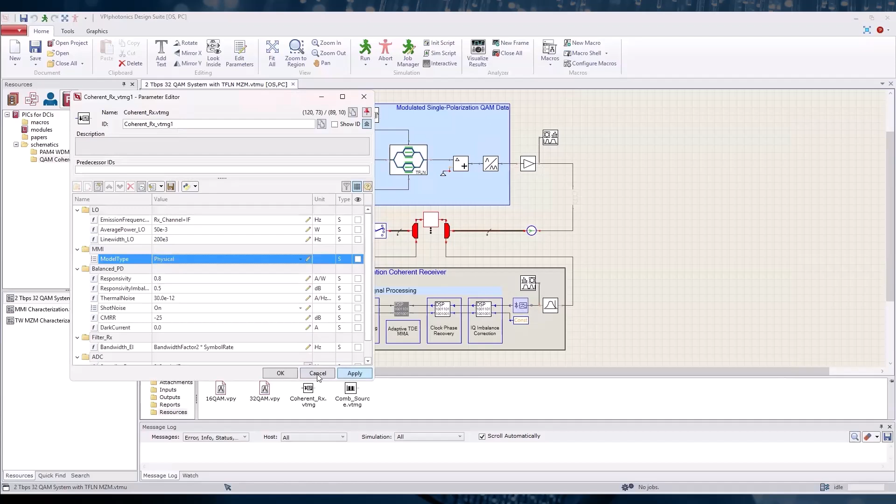Then I want to try to switch this on, to try S parameters and physical here for the modulator, and the same applies for the MMI here. Switch to the physical model and look at how it performs without the TDE, just with the rest of the DSP chain being active. That's case number 2.

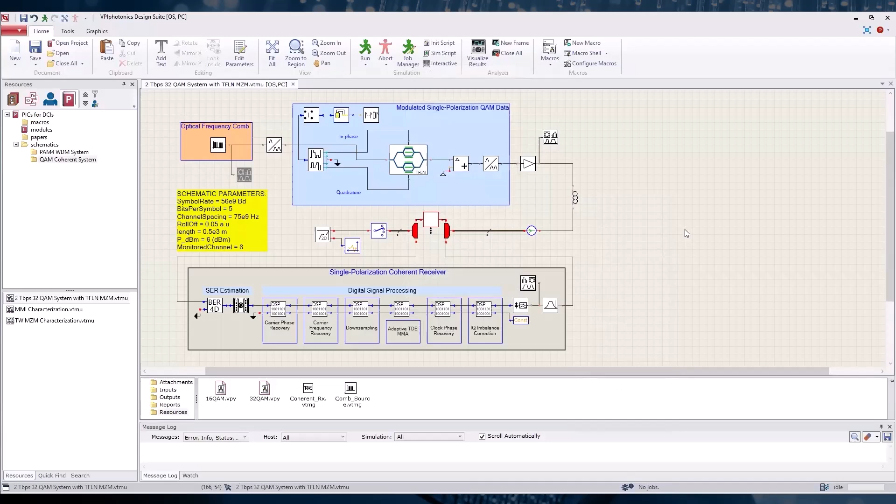And then I want to activate the fiber and activate the DSP and look at case number 3, see how it works with physical components here or physical models with TDE on. And lastly, I want to try to change the modulation format from 32 QAM to a lower order modulation, but with a longer distance. So now we have 500 meters and 32 QAM, that's 5 bits per symbol.

But with this macro here, I run this macro, 16 QAM, and this changes the modulation format to 16 QAM and 4 bits per symbol. And the transmission distance would be 10 kilometers. Of course, this means a lower bit rate in total, that would be 1.6 tera in that case. But I obtain a longer transmission distance, and that's a typical advantage of Coherent. That's flexibility, the trade-off between modulation order and transmission distance, which is useful for data center interconnects applications.